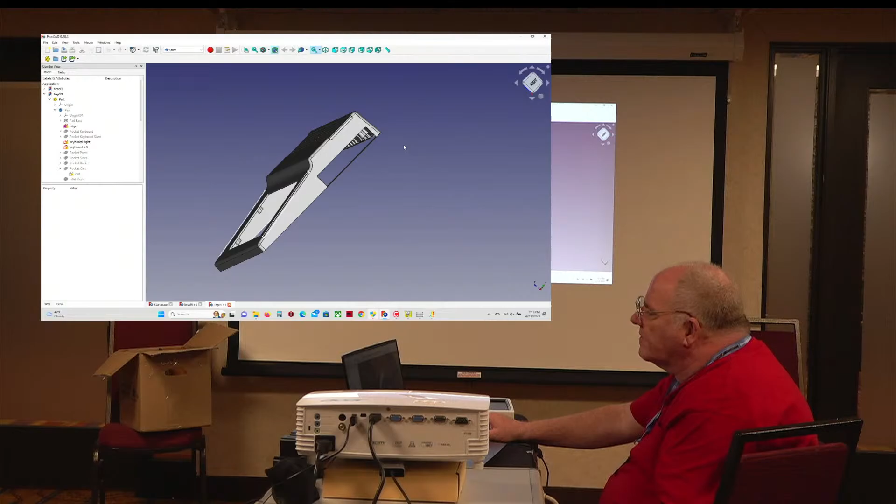And so let's bring up FreeCAD. Okay. And this, okay, this is one of the models I have of a full-size case for CoCo 3. You'll notice at the cartridge port, there's some things under that. That is how to stabilize the print. It is so thin it cuts out easily, but it's designed to help decrease the warp with the plastic pulling from the bed.

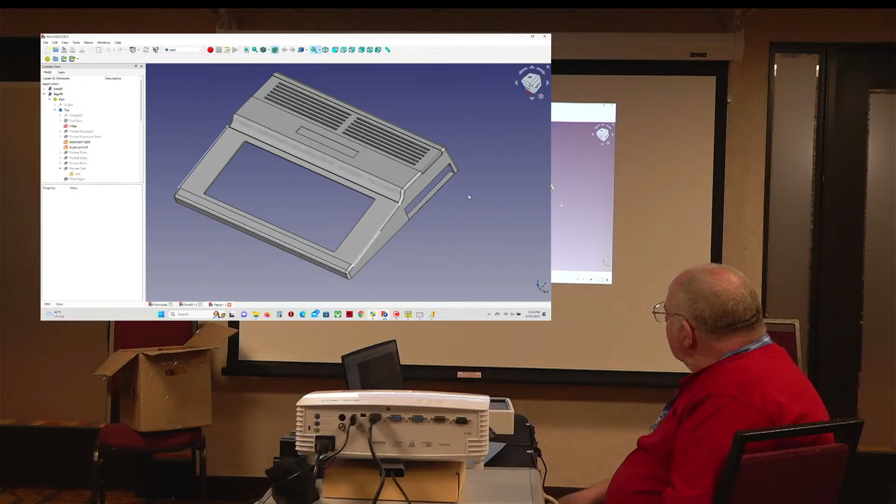So when you do this, you have to have things to handle how it's manufactured. And so we have that. Again, with what you just saw on the monitor, I have some extra tabs, really thin, so they trim off really easy, to help secure it a little bit better to the print bed so it doesn't pull off as easily. So you have to do those kinds of things for the manufacturing. I also have 2 resin printers, and what you have to do with those is a totally different set of things to stabilize the print.

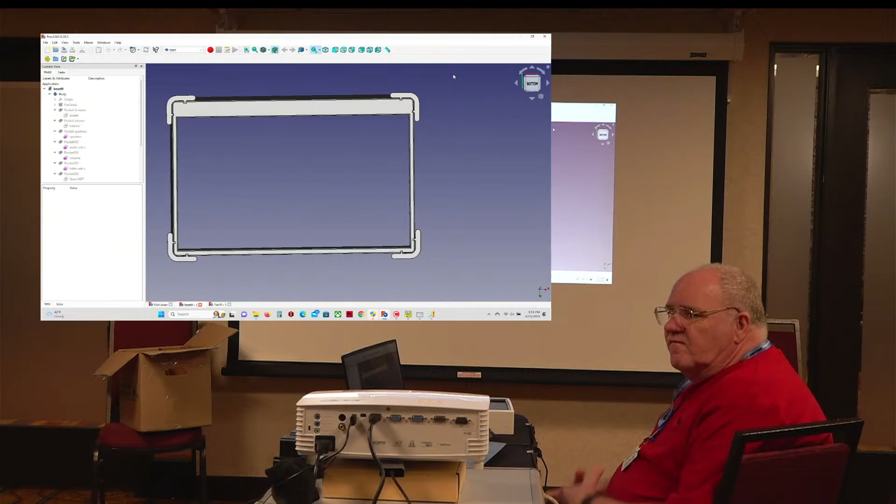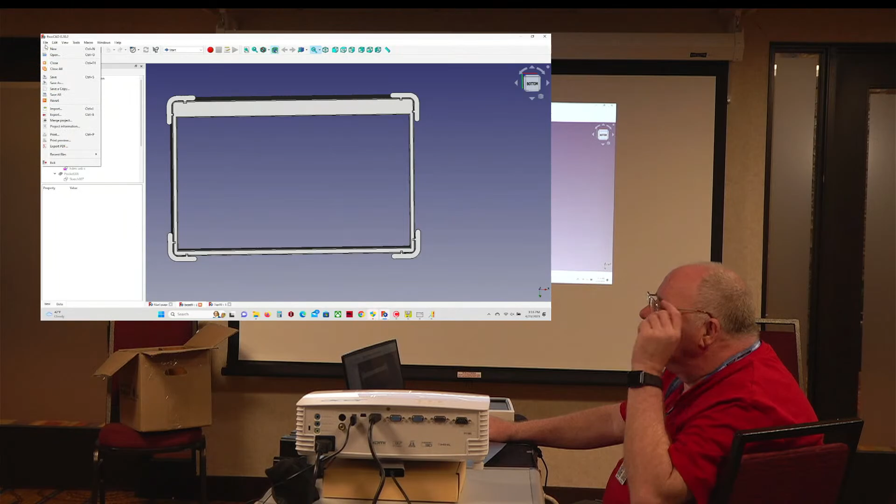And like I said, I apologize. I was intending to bring a new joystick over here and forgot to grab it out of the bag over there. We are in the process of going through my prototype stages for fit and everything for a new CoCo Pad. And we should be able to bring up a CAD file of that here in just a moment. Yeah. Okay.

So this design is printable both in resin or with what I want to call more traditional filament printing. It looks pretty good in both, okay? But it looks really exceptional, like a manufactured one, when you do it in resin. And most of the people here in the room have seen that actually. That's that blue one you have on your table? Yeah. Okay.

And I really think it's one of the things that's going to help take us to the next level with the CoCo while still being CoCo. This could have been done by a manufacturer back in the day and worked. The only thing that's new technology is the ability for me as an individual to make a case of this quality and this style, okay? Inside of it is old school, okay? And it has 6 buttons.

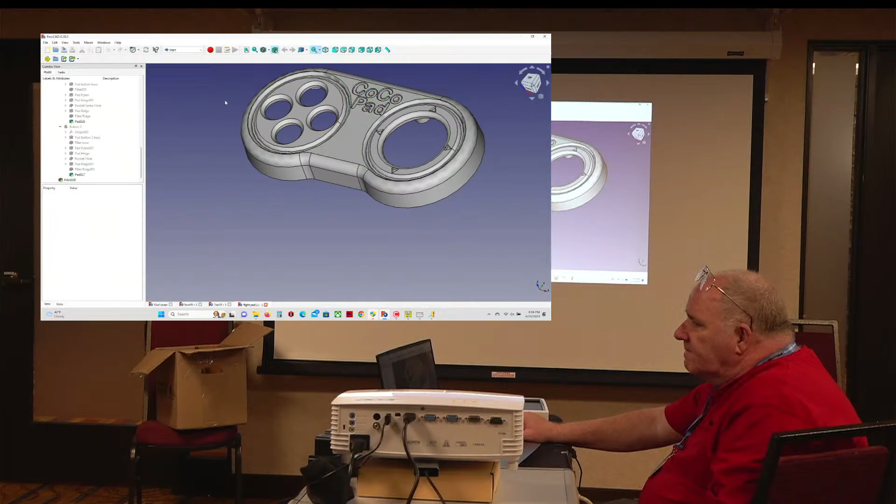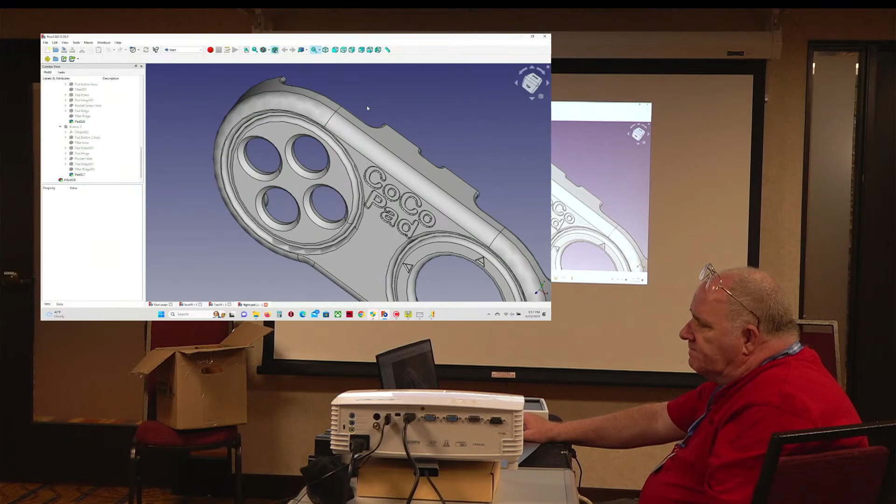It's got what I want to call the paddle buttons, or the front buttons. You use those with your fingers, and they're going to be fire 1, fire 2. And the 4 buttons, when you use the 4-button mode... I plan to have a compatible mode with a switch on here and the 6-button mode, okay? It plugs via cable into a standard joystick port.

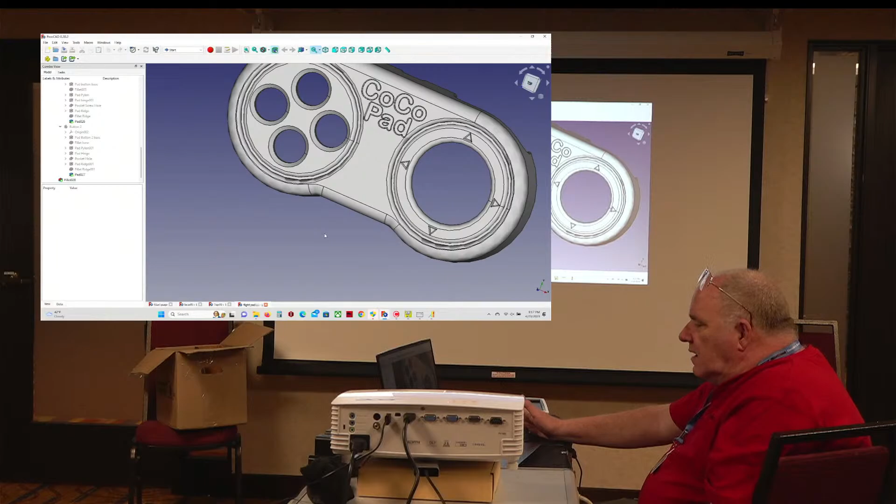In the compatible mode, you'll be able to read it just like a standard Atari style switching joystick controller, and use anything written that'll do that, which is a lot of the arcade action games and so on. It won't do games like Double Back that require full analog, or my Bomb Squad that requires analog. Gems requires an analog joystick. But for a lot of arcade style games, you can use just a switching joystick.

And we really haven't had a joypad for the CoCo. There's been adapters to hook up a Genesis or something. Yeah, there's been adapters, but not a native one that doesn't require an adapter. Right. There's some very nice adapters out there for the Sega that will support the extra buttons, okay? But it does require extra programming and understanding how things work to be able to read it.

A great idea. And I most likely wouldn't have thought of this if that was not out there. In fact, questions by John Linville actually got me thinking down that path and ended up with this. I'll explain that in a moment. The directional control will be hooked up to one axis of the joystick. The 4 buttons are hooked up to the other axis. You just read it like a general read, and then you handle the data that's equal to 63 differently than you would in a normal game.

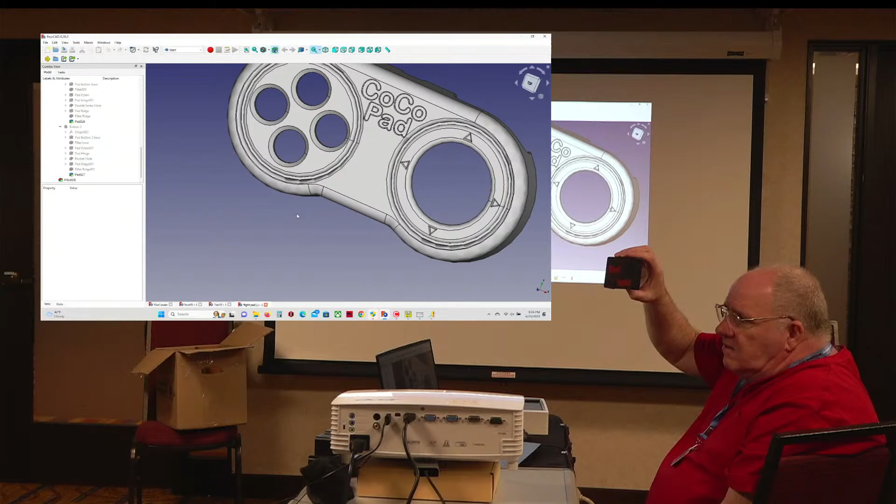I don't remember the size on the CoCo. I've been trying to watch that on this, whether it would do that or not. This is less than 3 cubic inch in shot size, from all the things I've been calculating. Now, I could be off, I could be totally wrong. But you could probably build, with stuff people have available, something to do a 3 cubic inch shot for less than $1,000.

Now the next thing is the mold. I have a resin printer. It is supposed to be able to handle a mold for low production quantity, if you use the right resin in it. We do have a community member who has a commercial resin printer. It definitely can do molds. But I don't know how big a size the resin printed molds will handle. They will handle small things, like the buttons and stuff on the joypad controller. We could mold those if we had an injection molding machine.

We could do replacement keys. Okay, for the CoCo, we had an injection molding that would match the CoCo, or as close as we could get it modeled. I have gone as far as modeling one of the rows of keys on the CoCo, and it does fit on the keyboard. I haven't taken time to do the others. I will probably do the others. And again, it's just part of my...

Out of curiosity, how expensive is it to do little keys like that, like if somebody broke a key or is missing one? It actually doesn't cost very much to print per piece, but there's a lot of time involved just to do the one. If you build them in batches, you could easily sell them and make money at $1 a piece, but you've got to have them all perfected. I'm not quite perfected with all my supports yet so it comes out really good. I am still working on finding the best resins to use.

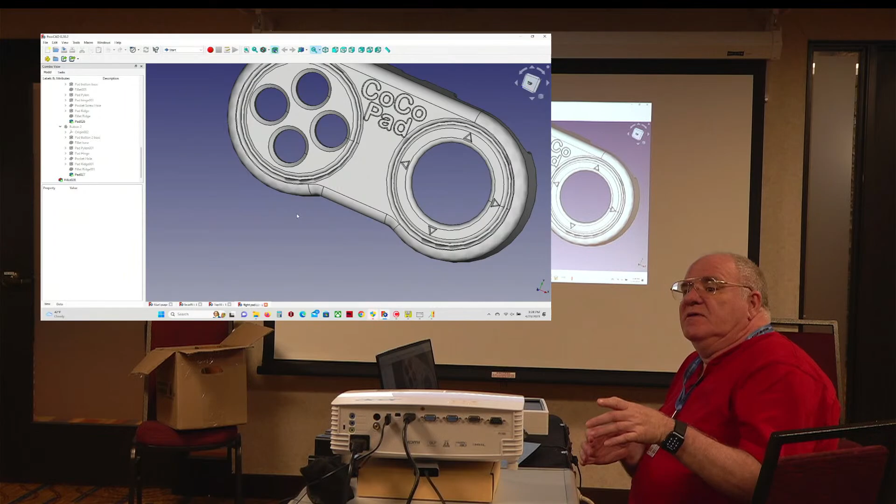So there's a lot of things you have to take on for it. We basically have to become miniature manufacturers to do this stuff so it really looks nice. If you want to do something, Sal, you take pride in your work, you want to make good quality work. I look at my CoCo Pi case that I do and I go, this isn't really the quality I want. Still pretty nice. Yeah, that's what everybody in the community says, they're pretty nice. I got one. Yeah, that's what they say.

But those were the compromises I had to make to be able to print that in a reasonable period of time, so the cost didn't double, and get it to a price people could afford. I did have somebody say, well, I might actually buy one at double price. There might be a few in the community who would do that, but that wouldn't have been enough to pay for the development. And so we have to make those compromises when we manufacture stuff.

So, I've got to do it within a reasonable period of time that I'm willing to manufacture it. I have to charge enough that, okay, I'm getting enough from this, I'll do it again. If it's too much work and you don't get enough, you're like, this is not worthwhile doing. You have to balance all those points. And so those are the things you do.

And with the CoCo Pad, I'm always trying to think of what game I'm going to put with it. I want at least a simple game to go with the joystick when it's sold, so if you buy the joystick, you'll have something to play with it immediately. And I've been talking to some other game developers, and they showed some interest in writing games for this. So that's a big win, I think.

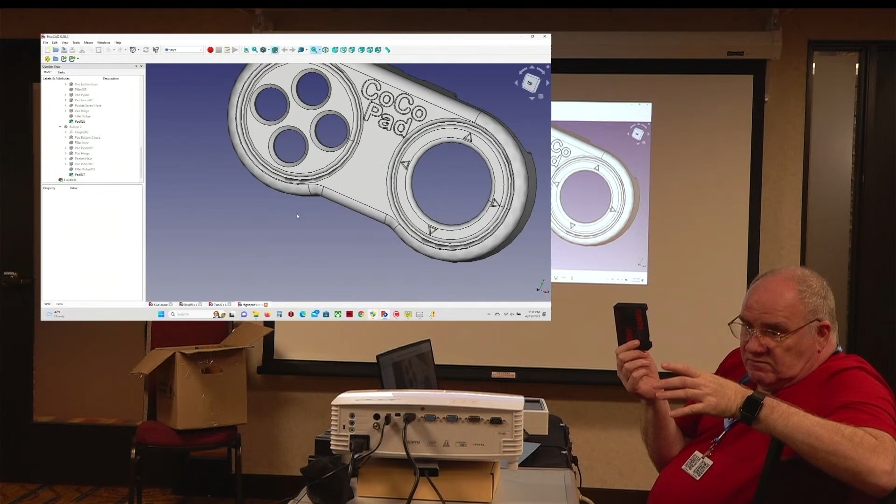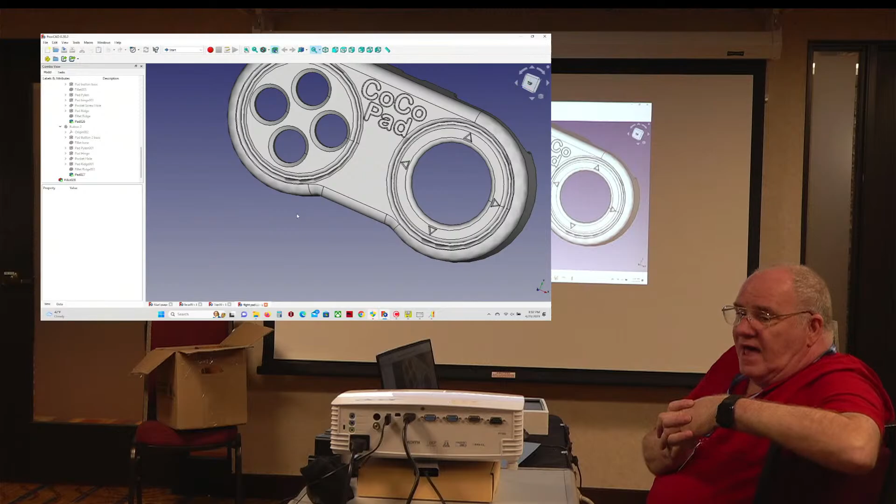And the other thing is, to do anything like that, you've got to have the quantity. Like I just informed Eric, with the shortage of Raspberry Pis, I'm not doing enough quantities of these Pi cases to cover the bad ones that happen on 3D prints. There's always those failures. The plastic is not in tolerance the way it should be. Or I showed him one case, it starts out white, and then I got a big blue band on the bottom. Same reel of plastic. So you have those you can't sell, you have to cover for that. So you have to have volume.

And so my CoCo Pi cases are gonna go up in price. I'm not getting the volume. Could that change in the future where Raspberry Pis come down and people start buying? They could go back down a little bit. But just with the volume I produce, it has to go up some amount.

I'm completely ignorant to 3D printing and all the challenges, but is there a way to do a 3D scan of things that then you could reverse engineer a mold? You can do 3D scans. I know that doesn't always help in 3D printing, because you've got to have scaffolding and whatnot. Well, those are added after the scan. Yeah. There are scanners out there, and they claim certain resolutions. But so far, what I've heard is it still has to be cleaned up afterwards. You've got to have software that can handle that. And I haven't had the money to go to that scanner level.

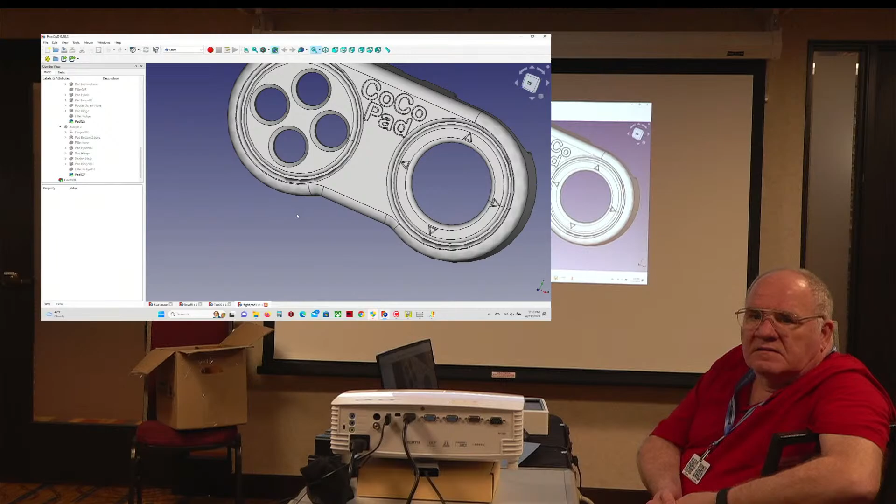I just didn't know if it was state of the art that we can 3D scan something and create an injection mold system, not just for 3D printing. It's possible. Yeah, some of that works better for small pieces. They're promoting this to companies, but most of the time that's a pretty expensive scanner. Again, it looks like it's out of our community price range. I think you need to look for some investors, man. Some seed money.

And you could get, I was thinking it was around $300, something that has a 1 ounce injection, which would start doing little small switches or keycaps. And I've been looking in my area in mid-Michigan to see if I can find an injection mold manufacturer. We have a lot of plastic manufacturers in the area because they supply the automobile industry. But most of them I found are in thermal molding, where they're pressing or doing extrusion instead of a mold, which we need to make the pieces we need. And so I haven't found that yet.

I've run across truckers who delivered resin, asked them questions, and looked on the web. I know there are places in southern Michigan, but they talk pretty much about doing automobile stuff, and I think they're too big a quantity. I've been hoping I'd find a fairly small shop that might be willing to work with somebody, but I haven't even got a hint at getting that done.

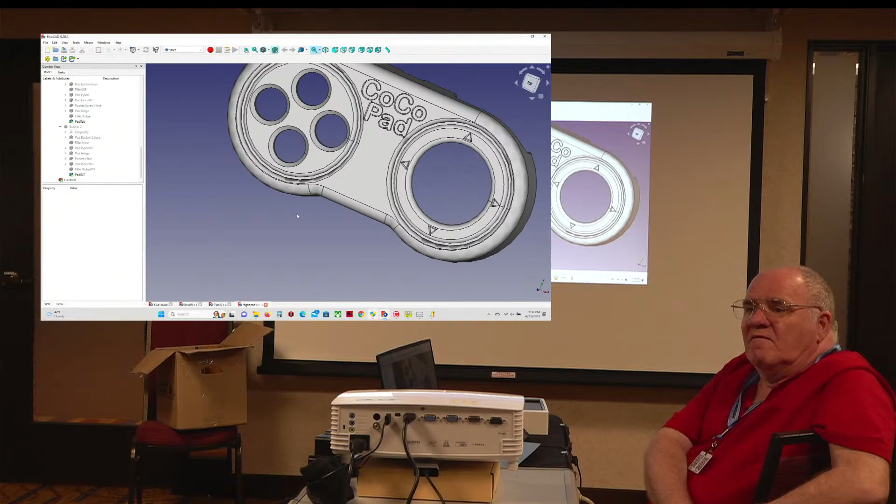And of course, if you have the injection mold, it's finding the right plastics and sourcing the plastics and the quantity. You could end up having to buy a barrel of their pellets, or 50 pounds of it at once, and paying $500 for the plastic. So there's a lot of issues with injection molding that I think could be overcome if somebody had the money to do it and the will to do it.